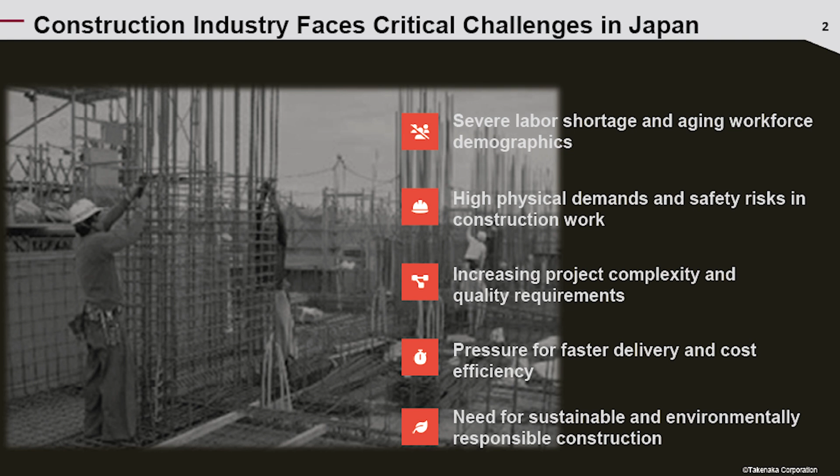As a construction guy, I've been seeing how the construction industry in Japan is widely changing. As Murakami-san mentioned, the number of construction laborers is decreasing and we have fewer skilled workers due to the aging problem. On the other hand, the complexity of projects and buildings is also increasing. In addition, we must have responsibility for schedule and cost, and for sustainability and environmental matters. So we must accept and adapt to this situation.

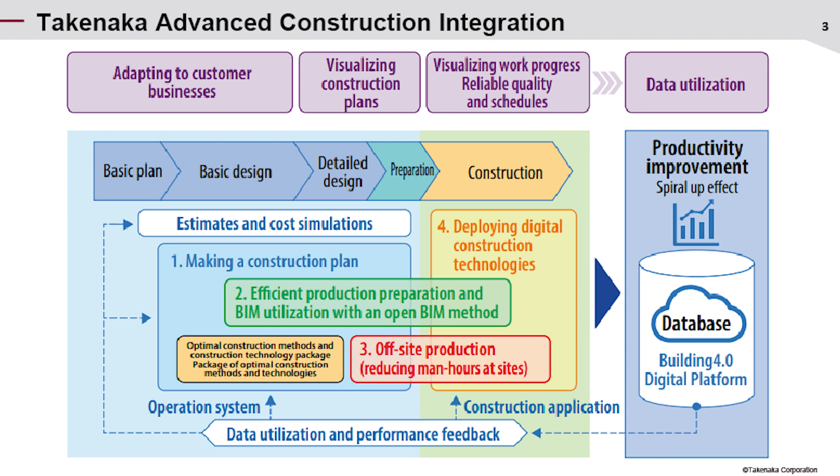To overcome these circumstances, Takenaka established Advanced Construction Integration, which promotes creating better solutions for construction at the very beginning of each project, from the basic plan through construction. Here are the four major concepts of this system.

First, start making construction planning in detail from the beginning of a project, like the basic plan. Second, utilize open BIM methods and efficiently collaborate with other parties. Third, try to apply off-site production like precast or unit modular construction, which reduces site work.

And this is today's main topic, number four: on construction sites, we proactively try to apply digital construction technologies, including RX.

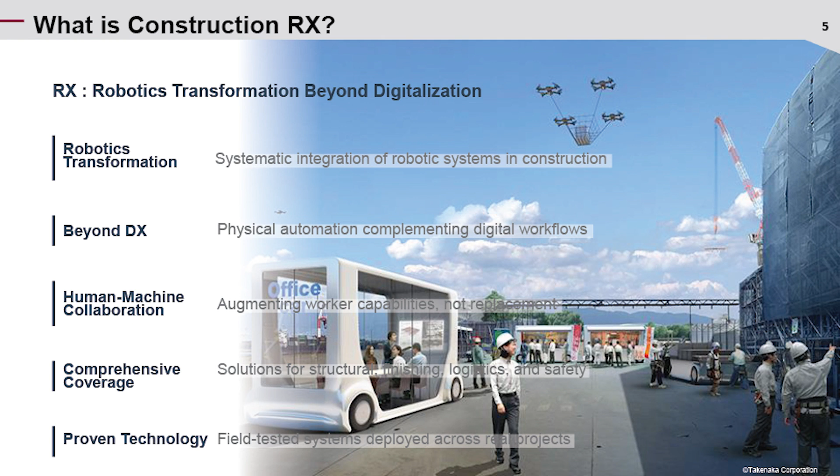So before introducing Takenaka's products, let me roughly explain RX. Construction RX, which means robotics transformation, represents Takenaka's comprehensive approach to integrating robotic systems and automation technologies throughout the construction process. These are the five general key factors of construction RX, shown on the screen.

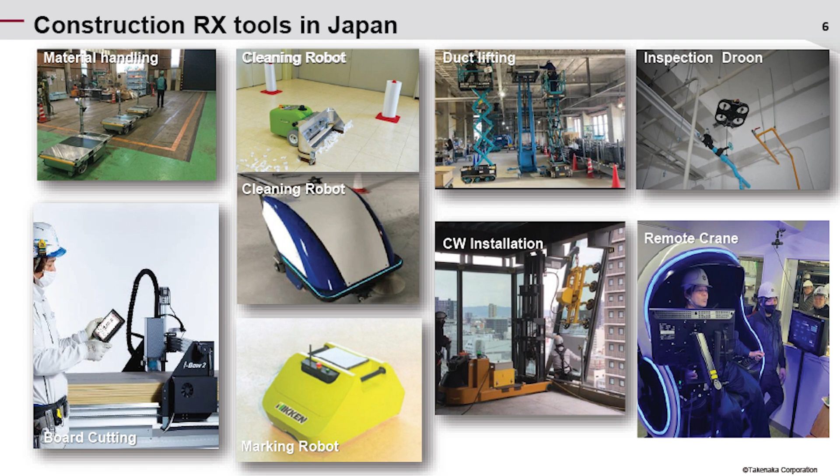Here are several examples of Takenaka Corporation's RX tools in Japan. We have material handling machines, cleaning robots, lifting equipment, and inspection drones inside buildings, which connect with a BIM system, and so on. We are now developing at least 10 products per year, trying to do something like that.

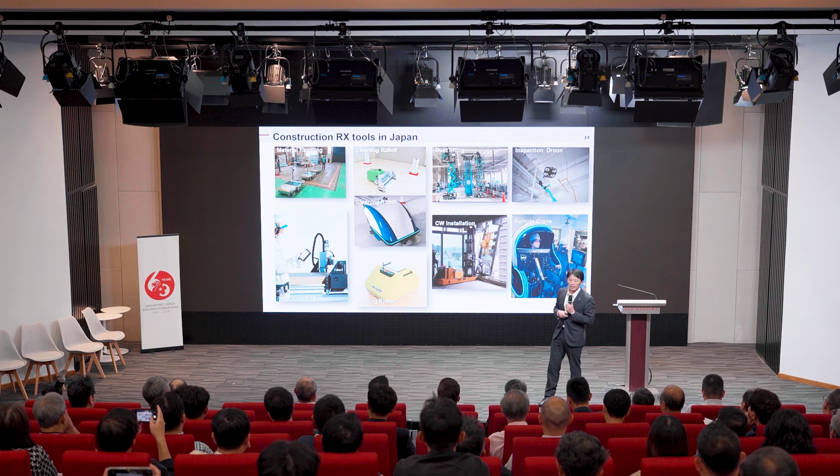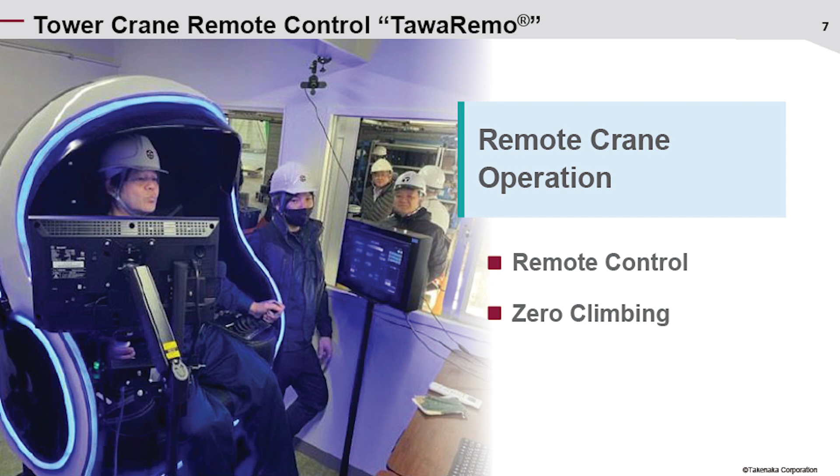Today I would like to introduce two products here. The first one is TawaRemo, which Murakami-san also introduced. It's developed in collaboration with Aktio and realizes remote control operation of a tower crane.

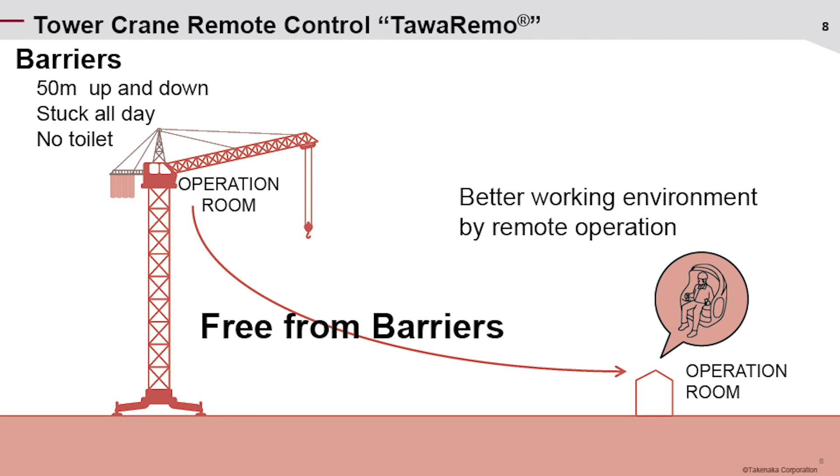Today, a tower crane operator must be at the top of the crane. He must climb up in the morning, then stay in a tiny room and operate all day. Sometimes he might even miss going to the toilet. He can only climb down at the end of work. So that environment is very hard for them.

By utilizing TawaRemo, he stays at the operating room on the ground and remotely operates his crane. He has no strain from climbing, and can switch to operating a crane at another construction site from the same place. In addition, experienced operators can stand by alongside the younger generation of operators and teach them directly, so TawaRemo can also enhance education and skill-building opportunities.

Being involved in the establishment of the regulation and applying it to the construction industry in Singapore is literally meaningful for this future vision of TawaRemo.

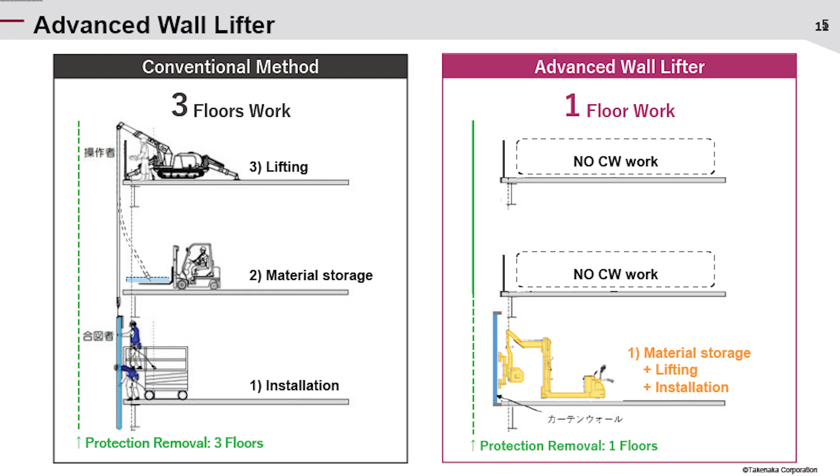As a conventional method, we usually use 3 floors for installing the curtain wall, so we see 3-floor openings without protection during the installation work. By using this lifter, we can reduce the workspace to only 1 floor, so that workers can install the material easier, faster, and safer.

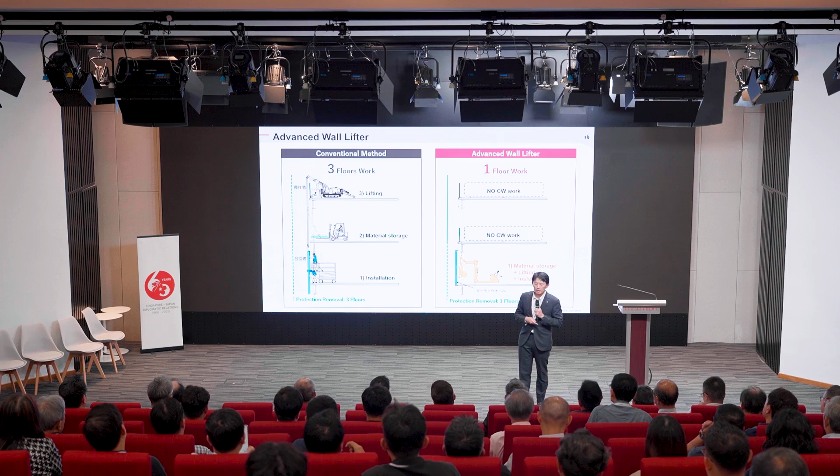This equipment consists of 2 components, the main unit and the suction jig. Please visit our booth to see the product. We have an actual product over there, so ask any specification or detail there.

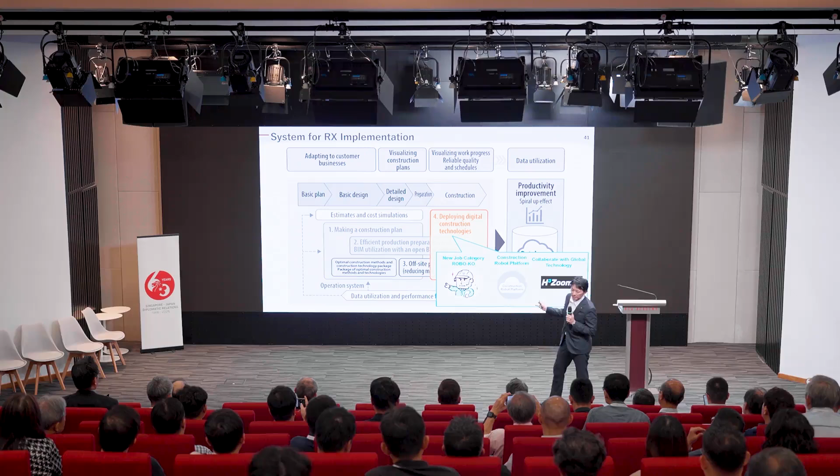I introduced 2 hardware products so far, but developing hardware alone is not enough. Back to our diagram, we need to consider implementing RX into our advanced construction integration system. Let me show you our 3 activities.

The first one is Robo-Ko, which is a new concept of job category in construction sites. Recently we have a lot of robotics, IT tools, digitalization tools, and so on in our industry. But how about the construction site? I have heard a lot of voices from construction people.

Hey, where should I start? What can I do first? Who will be in charge of this operation? How to connect the network and so on. So it is really hard for construction teams.

Robo-Ko specialists will help such situations for the site team as an on-site digital integrator. Here's an example: one of the Takenaka construction sites hired one Robo-Ko specialist, and he handled operations like setting up a robot, teaching them, and coordinating collaboration between humans and robots.

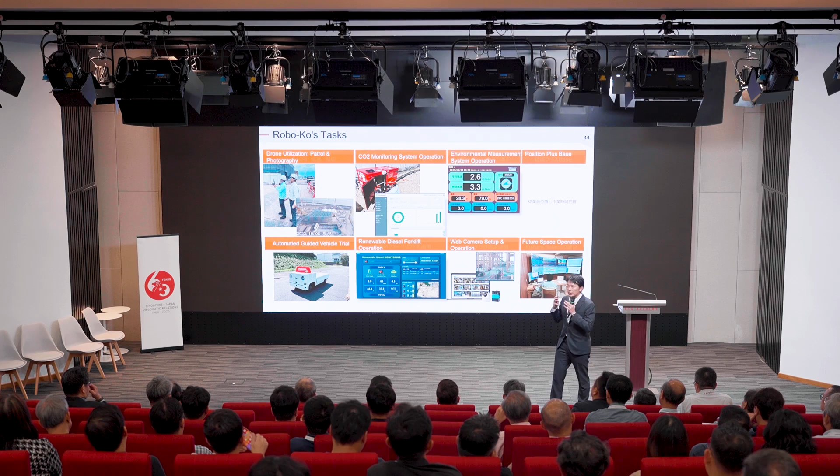This helped the site team a lot in implementing these new systems, and the site people could focus on daily construction management and gradually learn how to utilize it.

In addition, this is the second activity: we are now developing the construction robot platform.

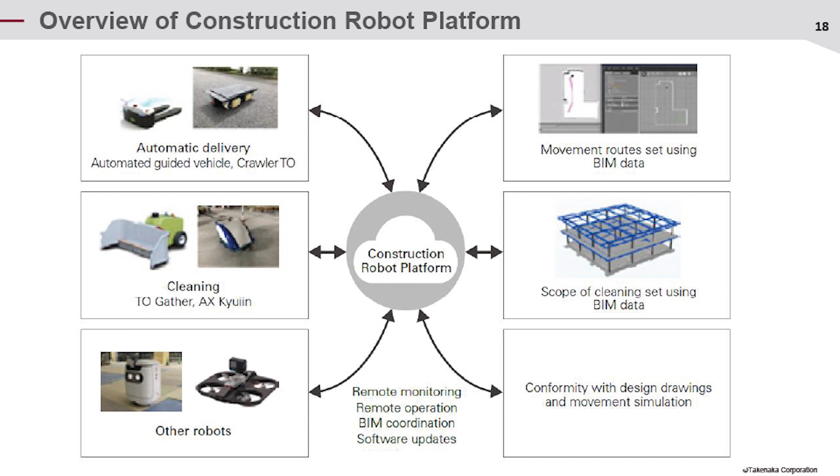Here's the overview. For example, automatic delivery robots or cleaning robots are connected and collaborated through this digital platform, and we can easily see where they are and where they are moving without any congestion. All robot routes or cleaning areas will be set in the BIM data.

Our goal is to secure remote monitoring and operation and BIM coordination, software updates, checking discrepancies between drawings and the actual construction site, and so on. All this information can be on this robot platform. This is our concept.

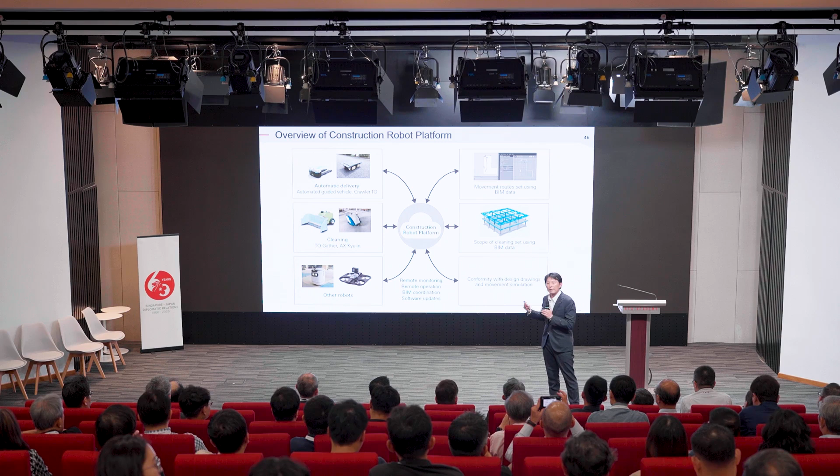The third one: we are seeking good chances to collaborate with startup companies. We do not only introduce new technology to others, but also try to find solutions for localization, like regulation, specification, or cultural barriers. We plan to join from the beginning of the project to the end.

As an example, we brought and supported Singaporean technology into the Japanese market. In Japan, Takenaka collaborated with H3 Zoom AI and launched a facade inspection and interior inspector with an AI-powered automated patrol reporting system.

That's all for today's presentation about Takenaka's robotics transformation. Our construction RX is not only about manufacturing robots. As one vital gear in Takenaka's advanced construction integration, it is our mission to advance robotics technology in harmony with digital platforms and improve productivity and safety across construction sites.

In order to create a more powerful and exciting construction industry, we have to collaborate beyond borders and remove the barriers. So let's connect in Singapore. Thank you so much for your attention.